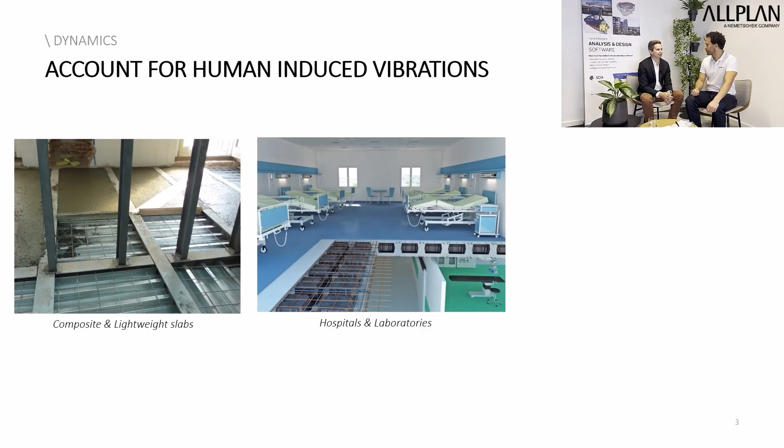How did we tackle them, and what is your impression on this topic? Yes, in SCIA Engineer version 26, we face some of these problems and try to bring new solutions. One of the first problems we want to challenge is human-induced vibration in buildings. As you mentioned, slabs are becoming more lightweight, made of composite, sometimes wood, sometimes voided slabs. The lighter the slab, the easier the possibility to incur vibration induced by human activity, people in offices or walking in hotel corridors, which is the problem in this case. The problem is the discomfort this can create for people due to the human-induced vibration.

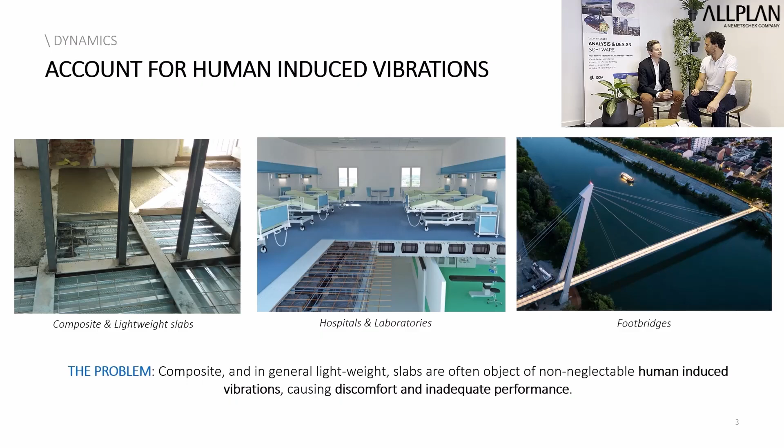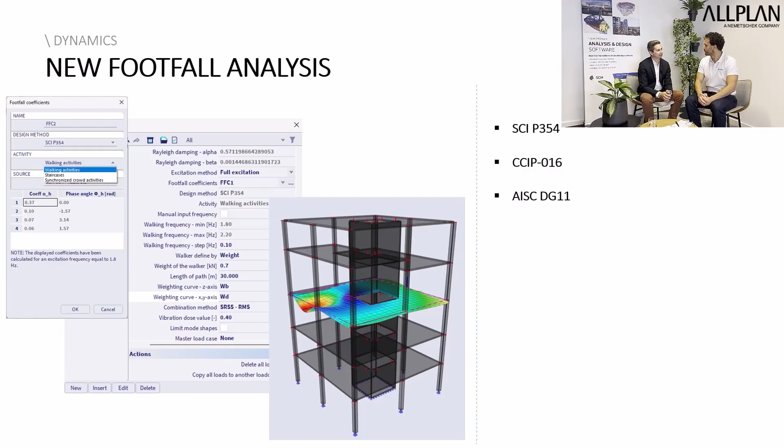And also the serviceability limits of the building itself are surpassed. How to deal with this? In SCIA Engineer version 26, we introduced the new footfall analysis. This allows already in the design phase to predict the vibration behavior that will occur in the building due to human activity. It's an approach based on design codes SCI, AISC, and CCIP, so we cover the three main codes dealing with human-induced vibration. It will enable the engineer to extract directly meaningful values like response factor and vibration dose value.

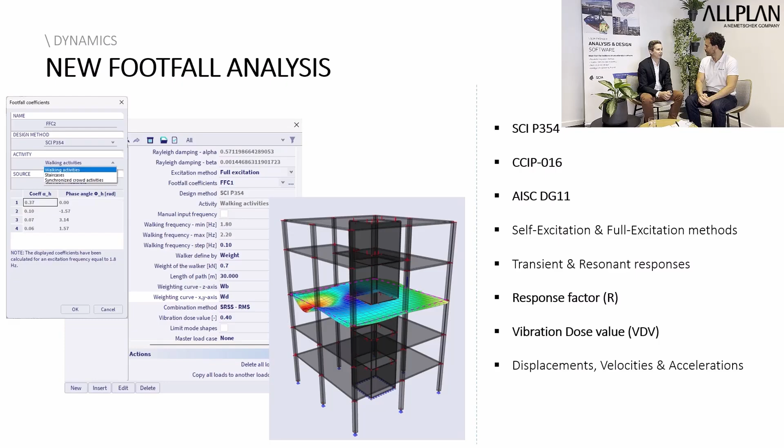Why is it important? It's important because too often in practice these problems are discovered once the building is already operational. But with the possibility to do this already in the design phase, the problem can be predicted, enabling the avoidance of expensive and costly retrofitting action. It's very important for structures made of composite or lightweight slabs, but also for buildings of particular use like hospitals, scientific laboratories, and footbridges. I think it's a very nice novelty in SCIA Engineer version 26.

Definitely, that looks like an impressive solution for this type of problem. We saw in this last slide a typical structure our engineers deal with, multi-story buildings with lightweight slabs. Now, the problem is punching with walls and columns. What are the solutions we offer for that?

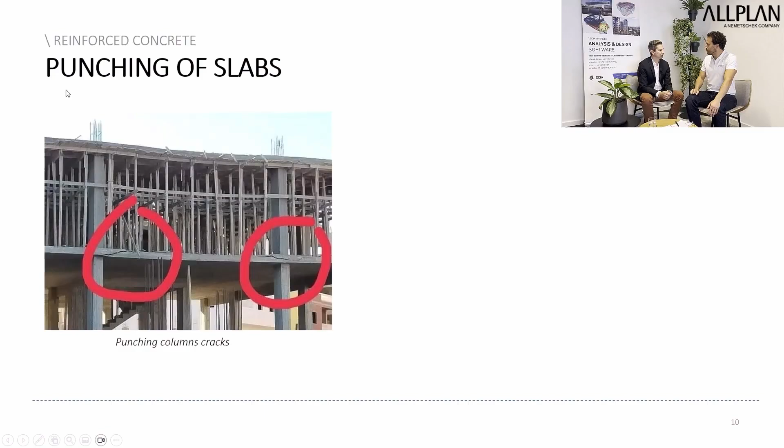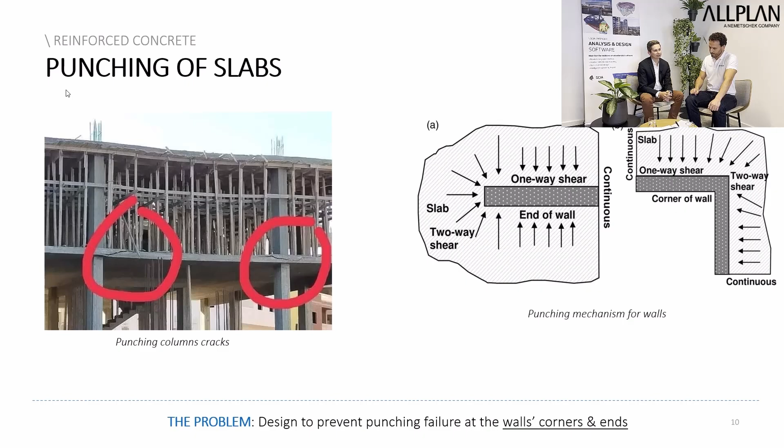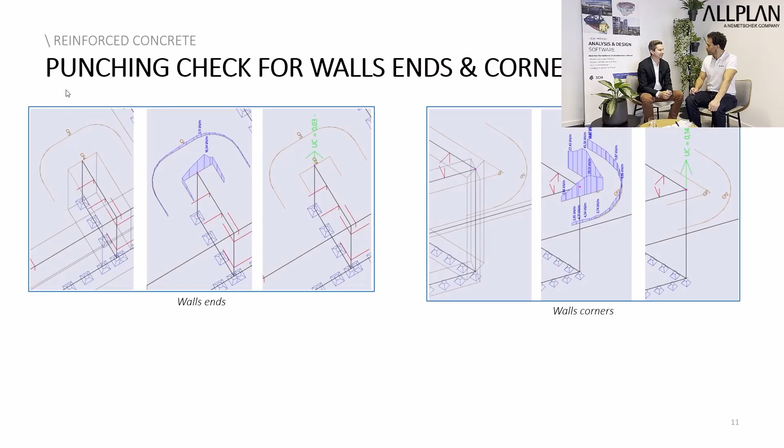The problem of punching of slabs can very quickly be neglected in the design phase. We already had in SCIA Engineer the possibility to perform design and check of punching with respect to columns of circular and square shape. In SCIA Engineer version 26, we extend these capabilities, and now we are able to design and check punching with respect to wall corners, wall ends, and also columns of any cross-section shape. So we cover the full spectrum of punching possibilities for reinforced concrete buildings.

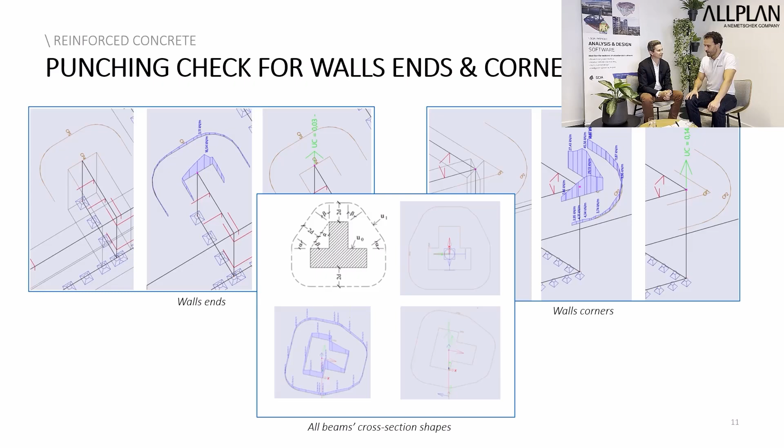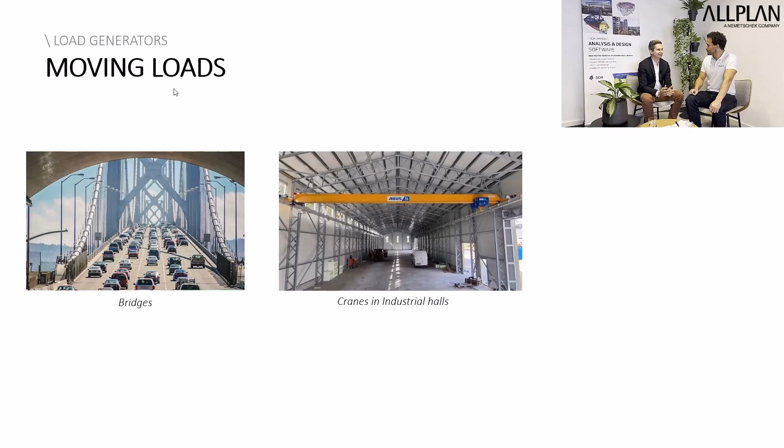The domain of civil structures is one we care about particularly. In version 26, we introduced two main novelties. The first one is moving loads. What is the problem with moving loads? Every time you have loads that can assume different positions in space, it's very easy to end up with a huge number of load combinations. This implies the computational time becomes huge, as well as the time for post-processing. So how to solve this problem?

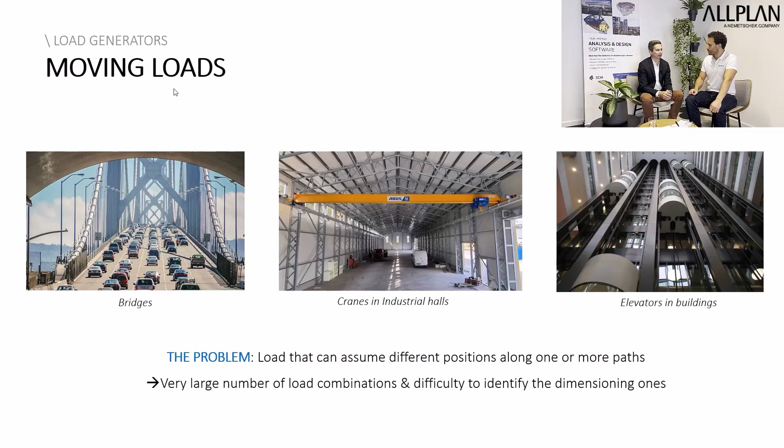We solve this problem using the mathematical theory of influence lines and influence surfaces. This is the possibility to compute a priori, via mathematical functions, the position of loads that generates the worst case scenario with respect to the response we are looking for, like moment, displacement, reaction, and so on. What does this imply?

This implies the possibility for the user to identify a priori, among the millions of possible load combinations, the few that are the designing ones, the worst case scenarios, and then to perform the finite element analysis and post-processing only for this limited amount of load combinations. This generates huge savings in computation time and post-processing time.

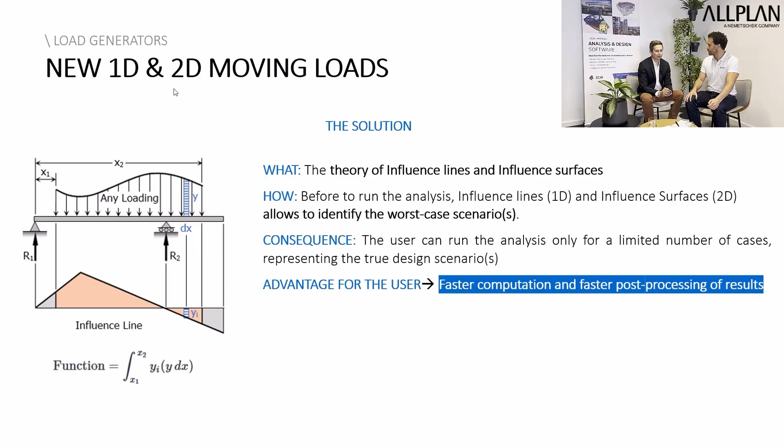In SCIA Engineer version 26, we introduced this feature both for 1D elements and for 2D elements, so surfaces. The implementation is very complete and sophisticated. There is the possibility to use all the load library coming from design codes.

There is also the possibility to synchronize or not the load across different tracks, and to use a diffusion cone for the load on the surface, taking into account the effective depth of the slabs. The user can use this feature for bridges, for industrial buildings with cranes moving along them, for the effect of lifts and elevators in high-story buildings, and others. So it's a very nice implementation for the user.

Congratulations, I think. And also, it looks like a really strong approach to save time, especially in the post-processing phase, which I think is one of the challenges in dealing with this type of structure.

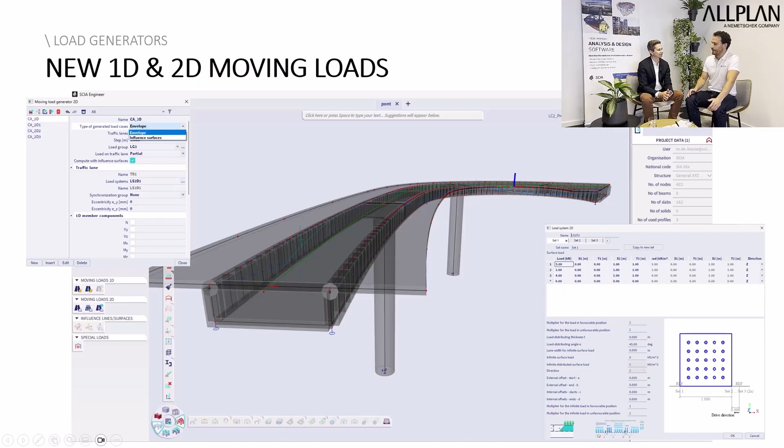Staying on civil structures, we are talking about moving loads, about retrofitting. Loads are changing, challenges are there, and new approaches too. Luckily we have improvements in the software, but this also means we need to go back to existing structures and deal with them. What are our solutions and key points on this topic?

If you look around, most of the structures that are built are old, not new ones. Most buildings or civil structures out there made of concrete are more than 50 years old, and sometimes approaching 100 years old. So they are at the end of their design lifespan. The challenge is what we do with the structure.

We demolish them and build new, which costs really a lot, or we try to see if we can extend the lifespan of the structure. In this last case, what we look for is a solution for retrofitting.

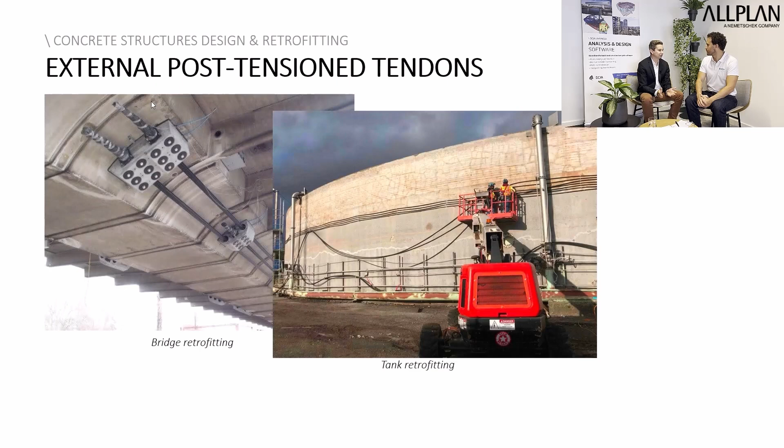One of the main solutions for retrofitting reinforced concrete structures is the use of post-tensioned external tendons. They are used because they are cheap, easy to put in place, and not invasive. Until yesterday, we were not able to simulate their behavior with SCIA Engineer, but starting version 26, we are able to model, analyze, and design with respect to post-tensioned external tendons.

Moreover, this implementation is fully compatible with construction stages. So people designing and analyzing more challenging structures can take advantage of the combination of post-tensioned external tendons and construction stages, in order to figure out the whole pre-stressing workflow.

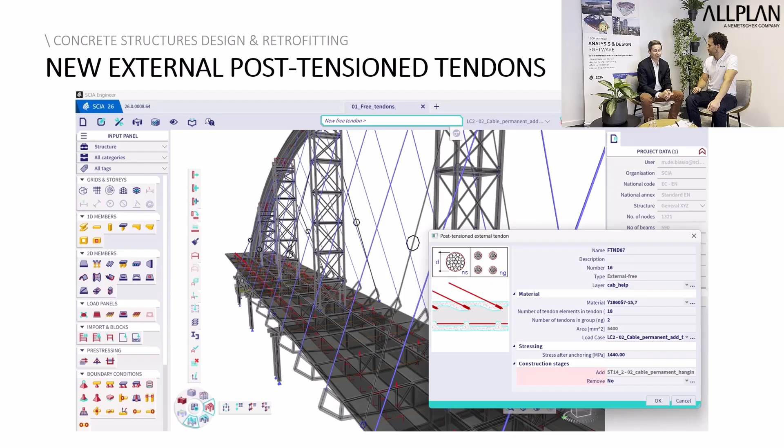I think there is also a small surprise, as you mentioned construction stages. There is something that's a small improvement but was asked by many people: the possibility to reuse variable load cases across multiple phases.

Until yesterday, if a user had several phases and defined variable load cases, once used in one phase, they could not be found anymore in other phases, so they had to be redefined. Now, if variable cases are used in more phases, the user can freely do it, just like with a standard load combination.

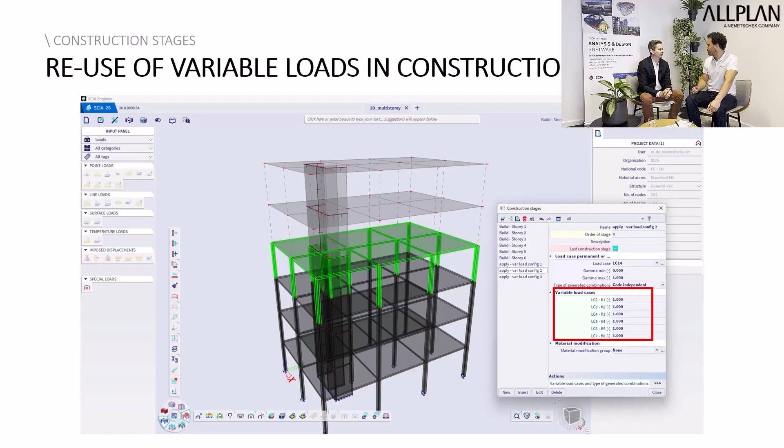Going back a bit to moving loads - we talked about moving loads on 2D elements, but mobile load on 1D elements is also important. This can definitely be a feature used in frame structures, for cranes, for example.

But going to frame structures brings other challenges and obstacles to our engineers, because we need to simulate the right behavior. There is an important aspect that is sometimes overlooked: the aspect of torsion. What can we say about that, and what is our solution to this challenge?

The problem of torsion is very important, because even if users sometimes tend to underestimate this phenomenon, it always exists - as soon as there is an eccentricity in a load that is not applied exactly on the axis of the element as designed, or an eccentricity in the support, there is torsion.

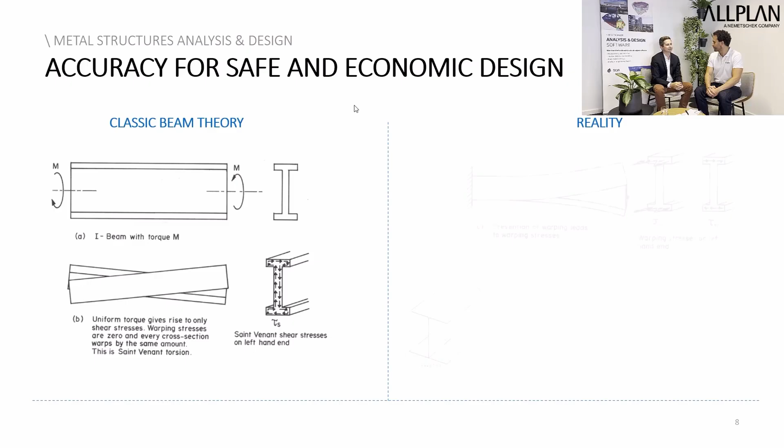Torsion is practically present every time. The problem for 1D elements comes from the classic beam theory used in the formulation of standard finite elements, because this theory totally neglects the phenomenon of warping that is present in reality. Warping is the fact that the cross-section deforms along the axial axis of the structure.

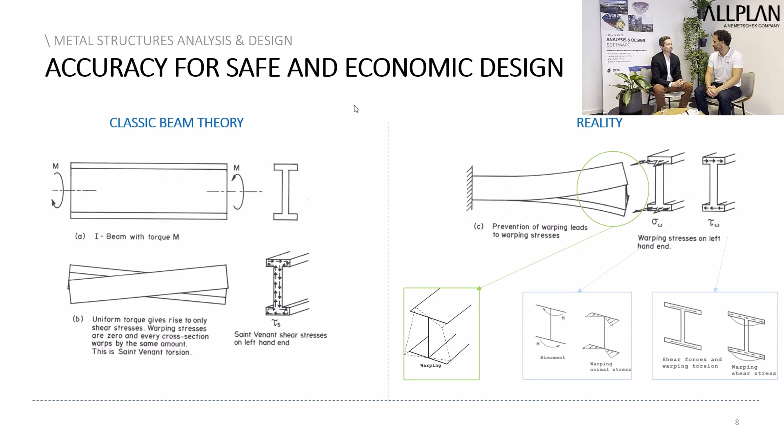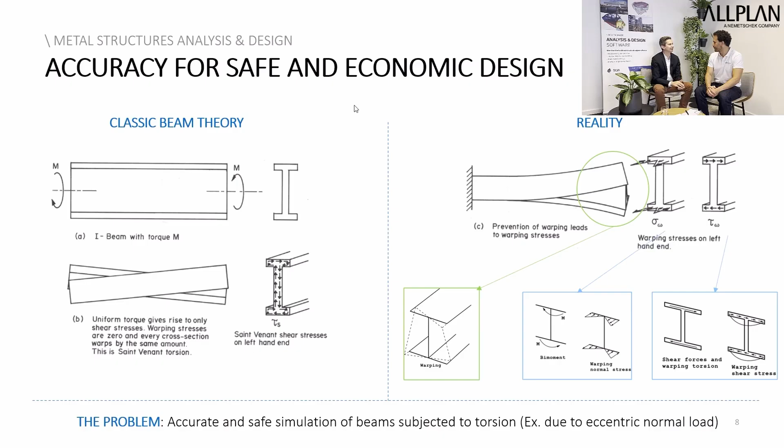Deforming in this direction implies the creation of a new component of stresses. How do we deal with this? We can deal with this, and we do it in SCIA Engineer version 26 through the adoption of a new finite element formulation that incorporates an additional degree of freedom that takes into account the deformation of warping.

The result is the possibility to do a more accurate simulation of reality, and so having safer results and more accurate predictions, and sometimes it translates into a more economical design.

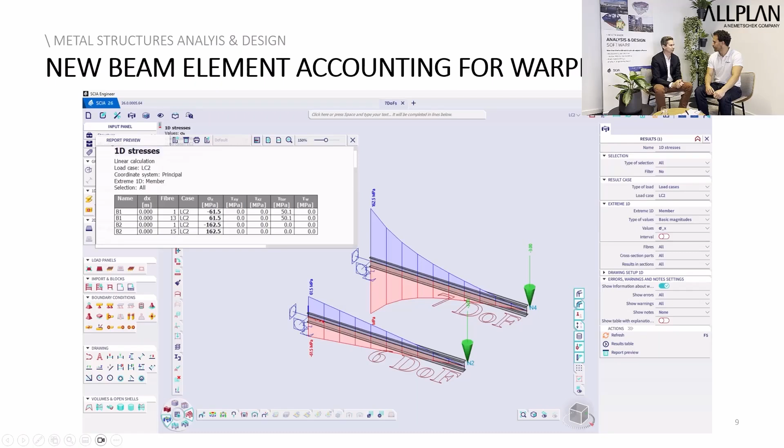But there is also another practical advantage: if a user uses a finite element beam with 7 degrees of freedom, he is entitled to skip the design checks for lateral torsional buckling. As users probably know, the Eurocode clearly states that if warping is explicitly taken into account by the numerical simulation, there is no need to perform a check for lateral torsional buckling, which can be very complex to do with the formula of the code. So this can be very beneficial in terms of time saving for the user.

This is a key point, not only for today but for the progress of the code. We are talking about Eurocode, but there's a new Eurocode approaching - a second generation Eurocode - and engineers will be faced with new challenges and new calculations. I think the 7 degrees of freedom will offer an important solution to both avoid manual calculation, where the risk of error is much higher, and to have a more advanced analysis of the structure. We are already looking at the second generation Eurocode, right?

Yes, indeed. The new generation of Eurocode, the second one, is approaching - the release date is approaching - and at ALLPLAN we have already been looking at it for several years. There is something already ready in the software that users can use directly in SCIA version 26.

That is the second generation Eurocode for steel standard and for cold formed steel. As for the other second generation Eurocode chapters, the work is ongoing and it will be ready - we will release it progressively every time we finish a part of it.

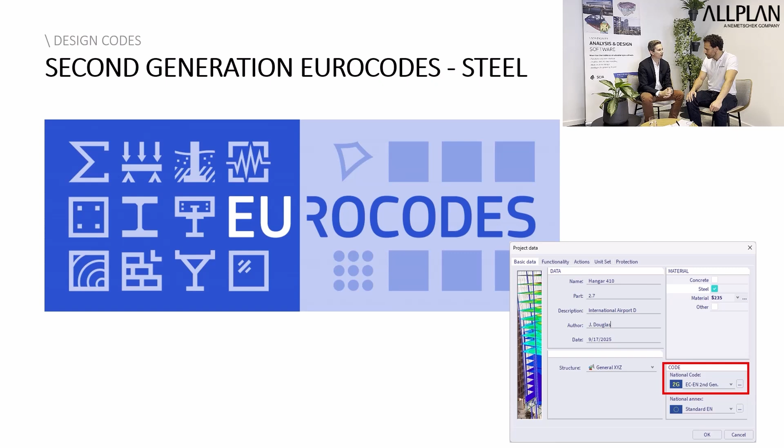Speaking about codes, there are also some novelties in SCIA Engineer version 26, such as the introduction in the 3D wind load generator of the American code ASCE 7-22, the latest iteration of the American code for wind loads. We introduced it in the wind load generator, and at the same time we kept the old iteration of the ASCE 7 code.

So users in the US, or those designing a structure for the US, can pick which iteration of the code they want based on which state they are designing their structure in, because as users probably know, each state in the US has a different current version of the code that is used - it's not always the latest one used in every state.

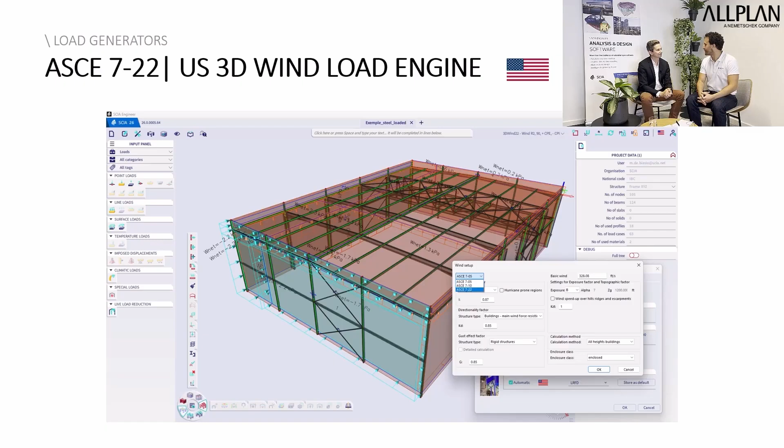That's a really good solution for all the challenges in the US code. But I think for the wind load generator, there are also some news for the Eurocode, right?

Indeed, indeed, there are two. The wind load generator is always an aspect of the software that is really requested, and improvements are asked for all the time. We did two new things in SCIA Engineer version 26.

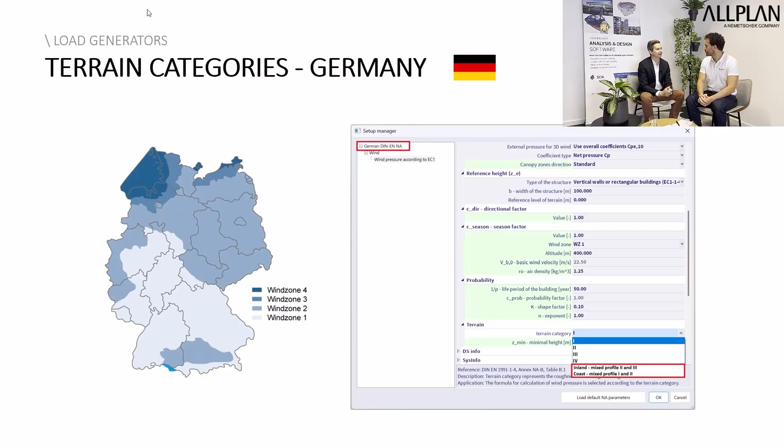The first one concerns Germany. Besides the wind zones 1, 2, 3, 4 that we were already covering before, we introduced the mixed zone - the inland and coastal zone - in order to take into account the full coverage of the German territory. The other improvement is more general, concerning the 3D wind load generator for canopy roofs.

In particular for the use of the load generator with the force coefficient approach - until yesterday, we were considering a limited number of possible wind direction cases. Starting with SCIA Engineer version 26, we cover all the possible cases specified by Eurocode for wind load with the CF approach, so the user can be sure that his design will always be the safest and most accurate possible.

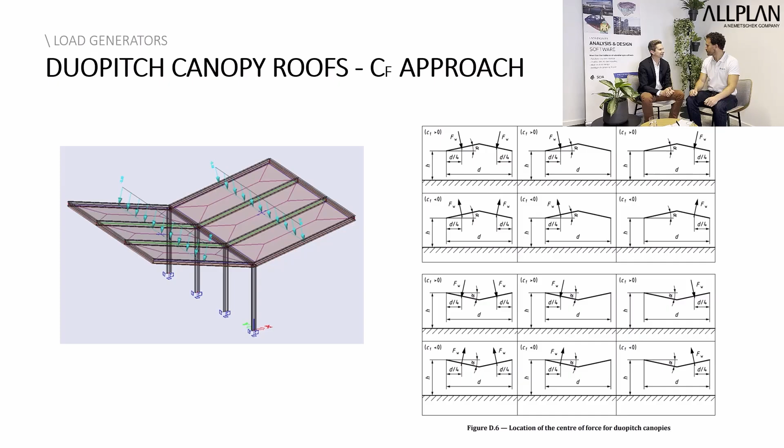Wonderful, I think we did the tour of this new release. So, in just a few words, now we can start to work with mobile loads, analyze civil structures and frame structures, going into depth and starting to use the second generation Eurocode. We can use SCIA for retrofitting civil structures and any structure we want to renew. We have a solution for punching that was impressive as well, covering the full spectrum of punching shear, and footfall, which I think was one of the most impressive solutions we give to our users. So it's time to start having a look at version 26, and we wish you a great day.